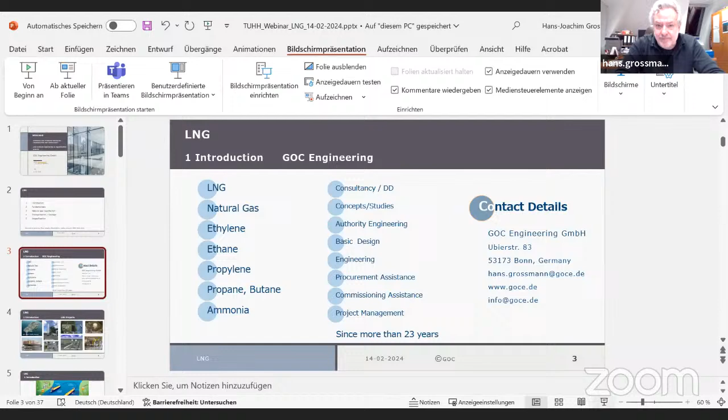It looks like there is some technical problem with him, because 2 minutes ago he was still here. Yes, but I'm still here - can you see me? We can hear you. We can see you now. Okay, perfect. I will share the presentation now. Yes, please. Oh, where are we? Here we are. Okay, it looks like it works.

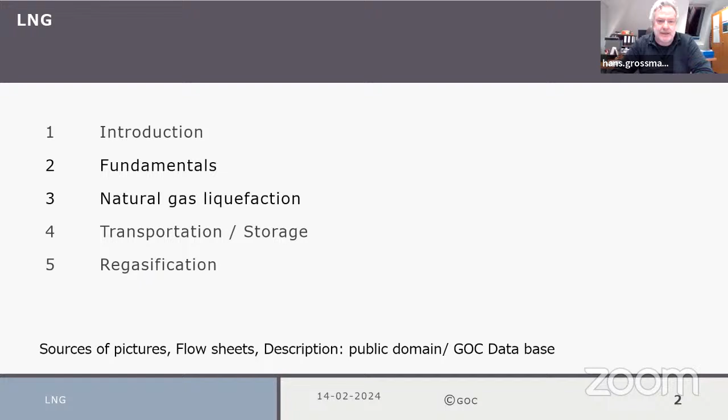I'd like to give you an overview of how it looks when you start to liquefy methane, and on the other side, how it is later regasified. We will have some introduction, some general fundamentals, so we can see where we are. Then we start with natural gas liquefaction - I call it natural gas liquefaction because what we are doing is not liquefying pure methane, we are normally liquefying natural gas. It will come then with transportation and storage, briefly, and then we go into the final part on regasification. Let me give some background on where we're coming from - GOC is an engineering consulting company in the field of loading and storage of liquefied hydrocarbons, ranging from propane, butane, propylene, ethylene, up to LNG, and we offer various services in this field.

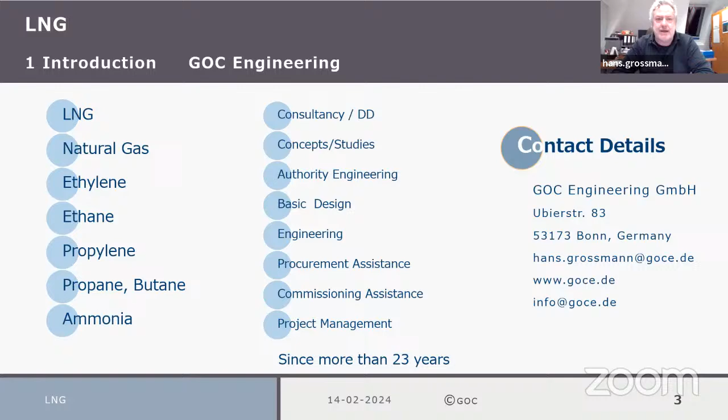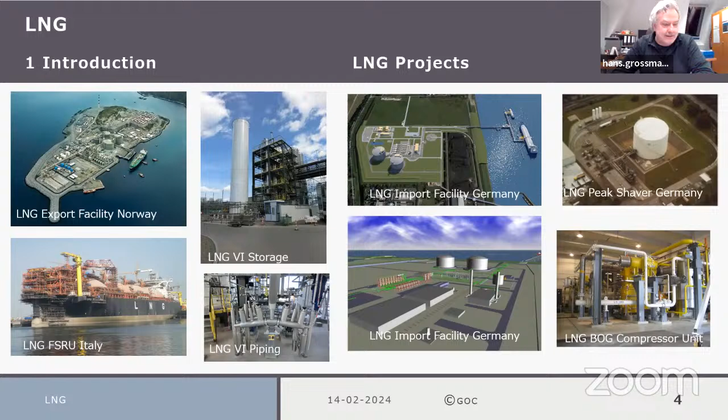Where we have been in various energy projects all over the world, starting from import-export facilities in Norway, up to FSRU in Italy and some others. We are also working on the import facility which should be developed or built in support of Brunsbüttel.

Looking at the overall view, this process starts within the liquefaction plants, where we have good sources of natural gas to import, but could also be where we have good sources of biogas. So it varies, and we have to see where we are on it. Then we step over to the other side, where we import or export our LNG product, and what we do to vaporize it and send it to our final clients.

Some small footprints also here to show what we are in.

What is LNG? Once again, LNG is not pure, it's a mixture. LNG mainly is of course methane, and it depends on what sources you're getting it from. We've put on the right hand side a typical composition from one of the key market players, Qatar, and you see there's a large portion of methane, but still others in heavier hydrocarbons like ethane, propane, or others. This could vary all over the world depending on the sources, so there's always a range we have to look into.

LNG is odorless, colorless, not reacting, normally stable, not toxic, not corrosive. So if you have to keep it under liquid condition, you have to put it in insulated cryogenic storage tanks.

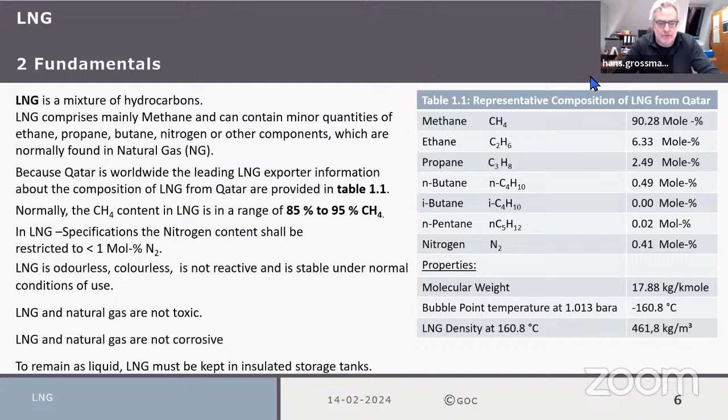Some things on the boiling points: somewhere around minus 160 degrees at atmospheric pressure conditions, at 18 bars somewhere around minus 110. So it's not pure, and the density even varies as well, ranging between 430 kg per cubic meter to 470. Again, these are only typical figures - it could always vary, and this will be part of your design criteria.

Liquefaction - what is the theory behind LNG liquefaction? What you like to do is normally be as close as possible to the natural cooling curve of natural gas, which has normally three main sections: a pre-cooling zone, a liquefaction zone somewhere in the middle, and some type of subcooling. We'll come later to what this means with mixed refrigerant and others, but this is just to show the idea behind it.

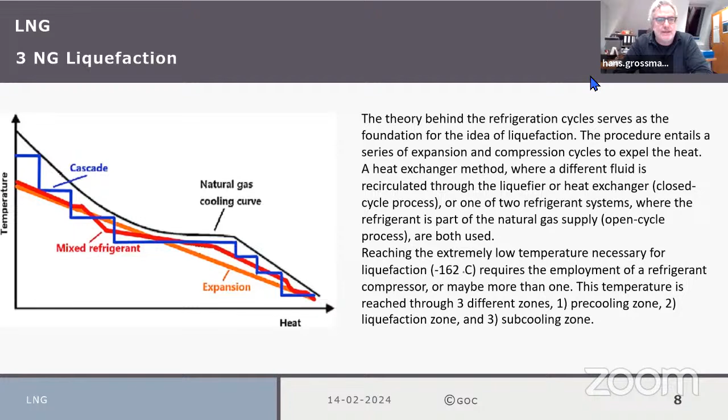You normally use various combinations and series of expansion-compression cycles to take out the heat with heat exchangers, all different types. It's all bits and pieces you have to put together to come as close as possible to the natural gas cooling curve. This is the main part behind it. When you look at the different types of processes, they're all trying to come as close as possible to this curve.

In general, there are three main different types of cascade liquefaction processes: one is cascade, one is mixed refrigerant, and the other is some expansion process. If you divide this, these are the main groups. Of course, within cascade liquefaction process you can also have some mixed or pure refrigerant - we'll come to this in a minute.

Starting with the easiest type of liquefaction: if you have enough pressure in your system - a high pressure pipeline system - you can use it like an open cycle process. You compress it to a high pressure, starting then to liquefy it, using Joule Thomson expansion for the cooling back.

At the end, if your pressure is high enough, say around 100 to 200 bars, with your Joule Thomson expansion you will get out a fraction of LNG. It's not too efficient, but we've seen some projects, mainly in Eastern Germany, Eastern Europe, or Russia, where they have high pressure and use it this way. Or if you're at the end of a pipeline grid where you have some of this pressure, it works - but once again it's not very effective and efficient. We'll come to this later on.

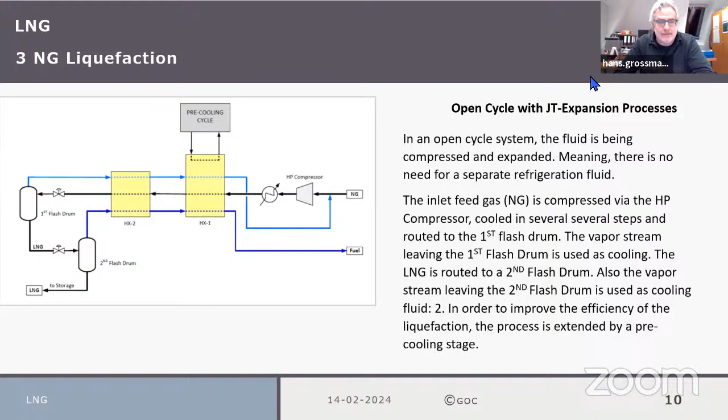One main thing to say, because we are starting with all this process, you have already to look into your gas treatment. When you're taking out natural gas from the earth or from the pipeline, it is not suitable to liquefy it, because there are still components like CO2 and others which you have to take out. Therefore, if you look at the footprint of a liquefaction plant, you always see at the beginning huge equipment with the only function to treat the natural gas first, so that you're able to introduce it into your liquefaction plant.

This is not part of this session, but you always have to keep in mind that there's a huge amount of investment and huge equipment already needed to treat your feed gas. Here we have a single nitrogen expander process.

This works just by compressing and single work expansion of nitrogen. The advantage here is that the nitrogen practically remains in the gaseous phase, and you only need the sensible heat which you take out for the cooling. On the other side, you need a huge amount of nitrogen, and it's not very efficient.

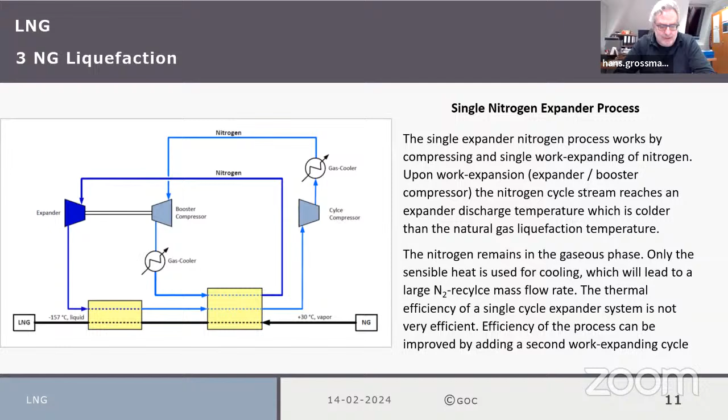This means we come in here with the nitrogen, have the heat exchangers going out, and there you have various loops to cool some of the natural gas with the booster expander and so on. There's also flexibility to add a second work expander cycle. This is just to show you the so-called nitrogen expander process, which is also in the market. How the market works, we will come to this point later.

The majority of liquefaction processes in the world, around 68-70% of all large-scale plants, are working with this type of dual mixed refrigerant process, patented by Air Products and Chemicals, with long lead experience. This is the so-called C3 mixed refrigerant process.

It's a process using propane as a type of pre-cooling to already take out some heat, then going into a central cold box heat exchanger where you have a closed loop of mixed refrigerant. Then you go back with your natural gas, which comes in at the top, and in counterflow to your mixed refrigerant you cool, liquefy, or subcool your natural gas.

The mixed refrigerant here could be a mixing of nitrogen, methane, ethane, and propane, all of which arrive and start to liquefy or vaporize. You have your individual sections in your cold box.

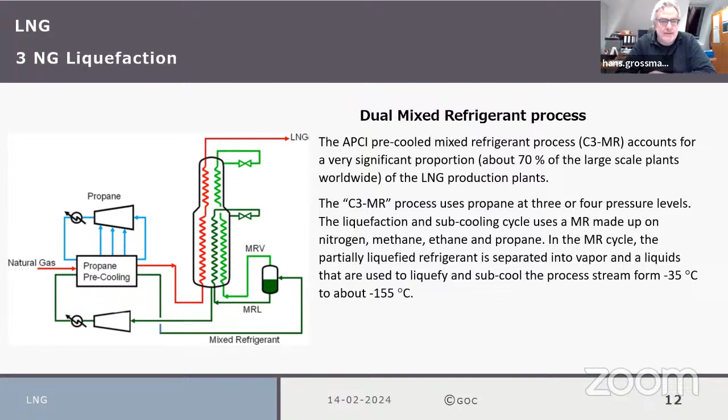This comes with subcooling from up to minus 155 degrees, and then you go out to your storage facility and maybe do your final Joule-Thomson expansion when flashing into your tank. This is the dual mixed refrigerant, one of the most known processes in the world for a couple of decades already, and of course it works properly.

There is an extension, or another process, called the expander process, where you're using natural gas and nitrogen as refrigerants. There are two independent cycles: one cycle using natural gas and normally methane as cooling fluid, and the other is also a nitrogen closed cycle, which provides cooling at moderate temperatures.

The nitrogen on one side, and then some of the nitrogen cycle, gives you the lowest temperature where you can cool down, or can liquefy your feed gas.

There are some options where you take out your heavy hydrocarbons. These are most of the things where process developers have their expertise.

Both cooling cycles, nitrogen as well as methane, remain in the gaseous phase. This means there are not too many problems in designing with respect to two-phase flows in your system or in your cold box.

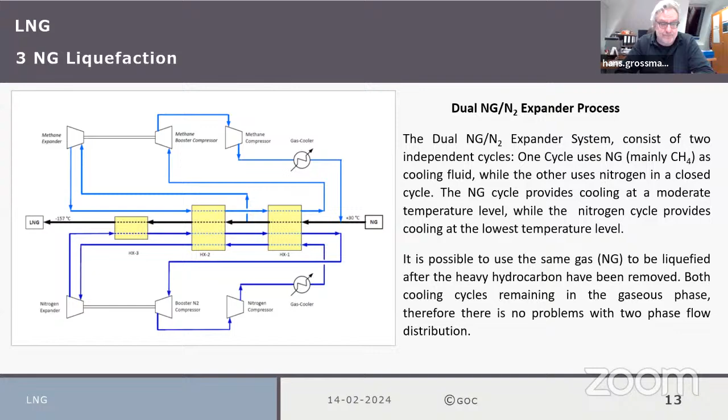Dual NG/N2 expander process.

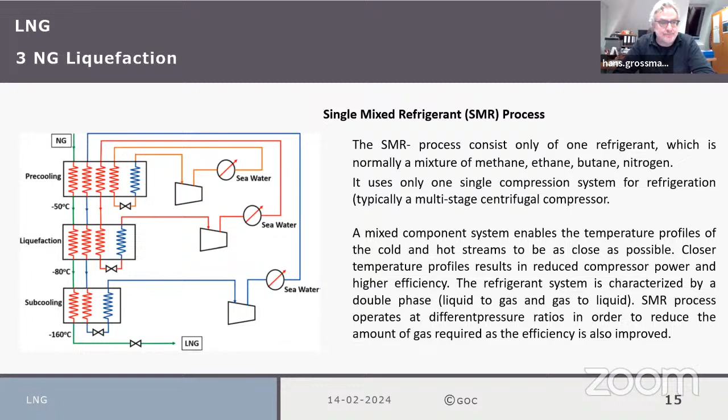And you can have double phases - on one side you're going from liquid to condense, liquid to gas vaporizing, and on the other side condensing in some parts. That's all part of the main heat exchangers. And once again, you have different pressure levels where you're working, which means you can also optimize the efficiency. That is the single mix refrigerant, once again well known in the area.

Just to have a small picture of how it looks like: this is a typical cold box prepared by the big makers like Linde or Air Products or others. You can see here the cold box, how many small tubes there are, how many different types of connections are on warm side, cold side, intermediate side, and all working in these tubes.

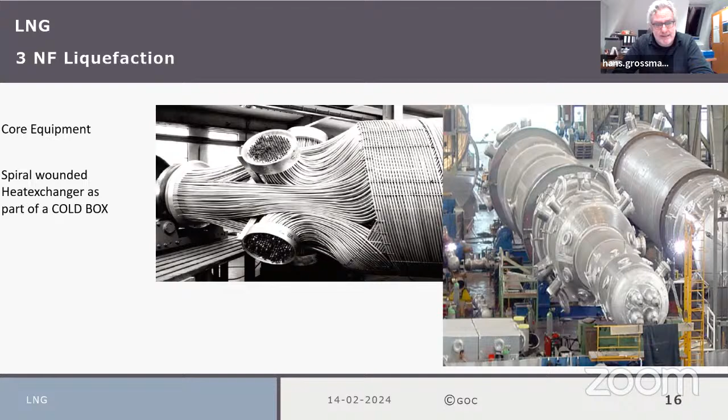Sometimes it's condensing and in some parts it's evaporating. So that is one of the core design challenges - to optimize this type of liquefaction, even knowing what is happening inside the tubes and in what area it's happening sometimes. You can imagine that you cannot have temperature sensors in all bits and pieces to look into. So that is one of the core challenges in designing, or even in the process simulation, of this type of equipment.

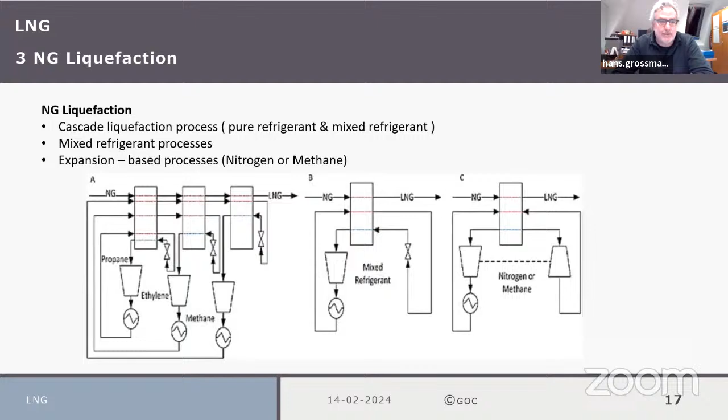So once again, we have three different types - could be doubled. We normally say cascade, mixed refrigerant, and expansion processes.

Having said this, you see the complexity of this type of liquefaction plant. Some of the design options where you have to start, or where someone beginning to design this type of process has to look into, is always a mixing, compromise, optimization of power consumption, of energy consumption. Even when you only look at power consumption of your compressor and so on, that is not enough. You always have to see the total system - what is also happening with your shaft power, with the efficiency of the heat exchangers and of the thing itself, besides of course capital costs, all the commercial things, and even operating costs.

If you have some type of batch operating, or continuous operation, or a variation in your operation, or you're running on one line, and how much you like to generate. And combined with this, you have to look into where you have maybe no chance for changes, like your natural gas feed conditions. Also, you need to optimize what composition you have to achieve and where is the best arrival point with respect to temperature, pressure, and flow.

The inlet temperatures with the minimum internal approach of the heat exchangers is one of the figures as well. And once again, efficiencies of compressors or expanders, besides the LNG rate.

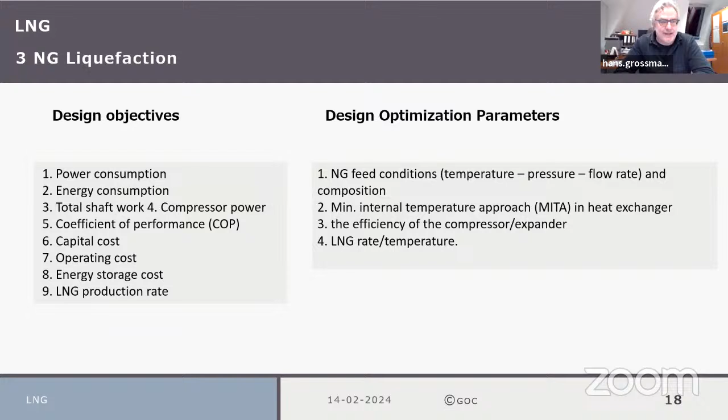So that's when you see the different types of processes, you see how difficult or challenging it is to arrive at saying my plant is the best one, or my liquefaction is the best one. You hear it always in the market, but once again, to arrive there is not so easy. So people will ask, what is then the best for these processes, maybe the best train efficiency or specific power.

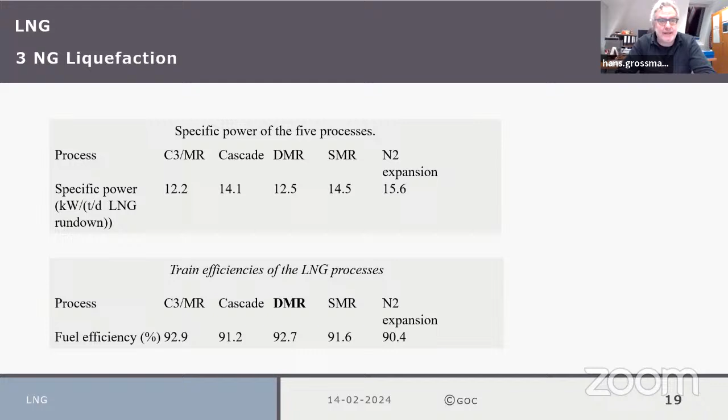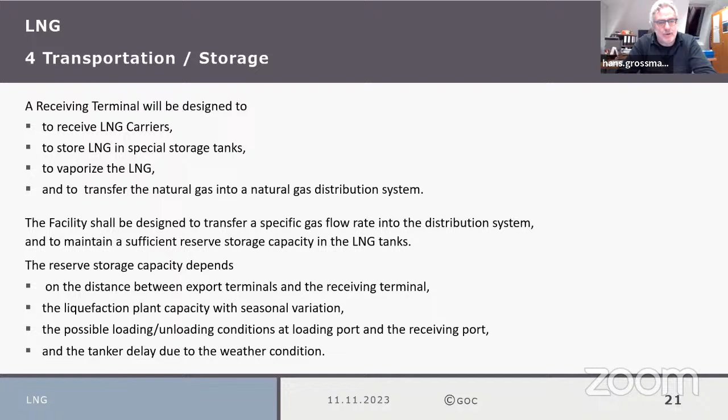Transportation, I guess the sea side will come later on with the second paper.

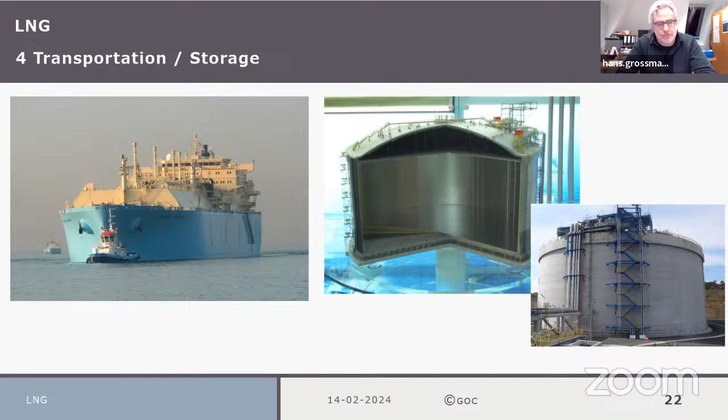Regasification: we've shown how it works. It comes from the ship, stored in the tank, very simple. There's also a boil-off handling system to maintain the low pressure and low temperature in the tank, using a recondenser to take out the LNG, and then a system to vaporize it. Normally you need a high pressure pump somewhere in advance due to your pipeline pressure. In addition, you can also take it out and send it by rail, by truck, wherever you want.

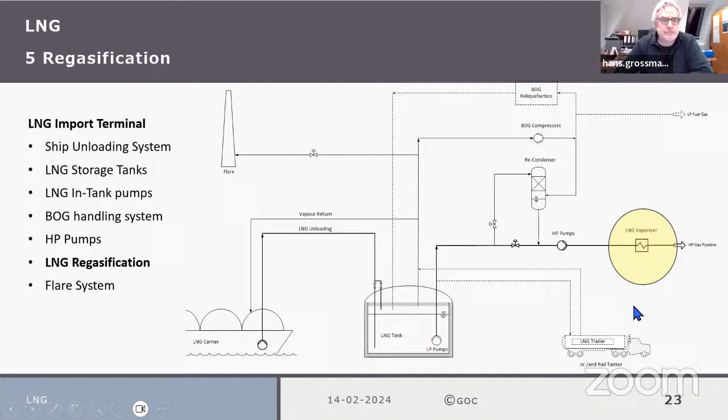The principle is simple: you want to regasify it, bring it back into gaseous phase, with a temperature slightly above 0 degrees, and maintain this temperature in your pipeline system.

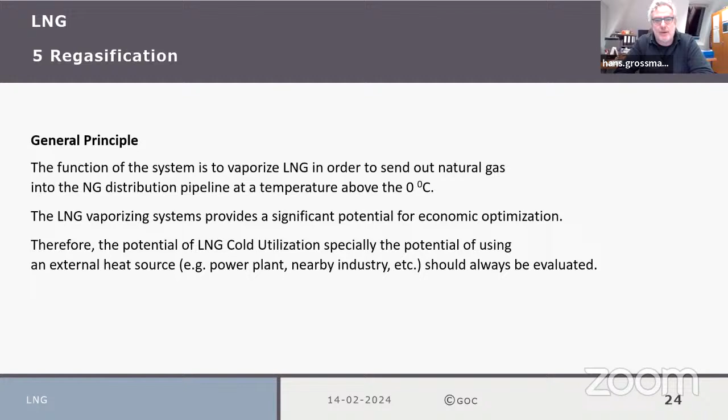There are always a lot of potentials to optimize the economics of the process, and cold utilization is one of the main principles to look into before starting any regasification work. Go to your neighbors and see if they have any type of waste heat, warm water from power plants, or whatever, in sufficient composition and capacity, which you can then use to vaporize it. That's the best way to optimize your entire system: look in the area instead of building in expensive, independent vaporizing concepts. So please look into your neighborhood and ask them for waste heat.

There are different types of vaporizers: mainly open rack vaporizers, submerged combustion vaporizers, and others using intermediate fluids and heat transfer fluids, direct and ambient types.

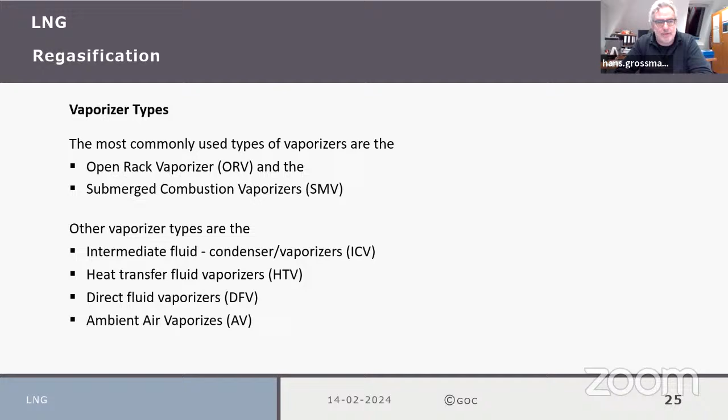We're coming to some of the common parts now. One of the main types used in base plants are open rack vaporizers. An open rack vaporizer is quite simple.

It's common practice, with a lot of import terminals having this type of open rack vaporizer, even in regions with warmer temperatures where it could work. In our region, or regions with minus temperatures, there's only a chance to use this type if you warm up your feed stream of water or have warm water available. But they are more commonly practiced in warmer regions. They look very heavy, and they are loud and noisy.

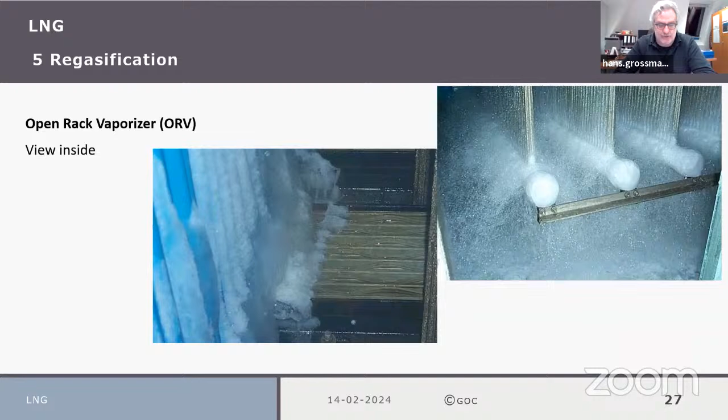Normally they are easy to operate, with low operation costs. Most are static equipment, with no pumps or anything else needed. Simple construction, and stability of heat transfer because you have this free-falling water film within. Alternatively, you can have a warm loop, a bypass loop, which you can use also over larger areas - these are more for large facilities.

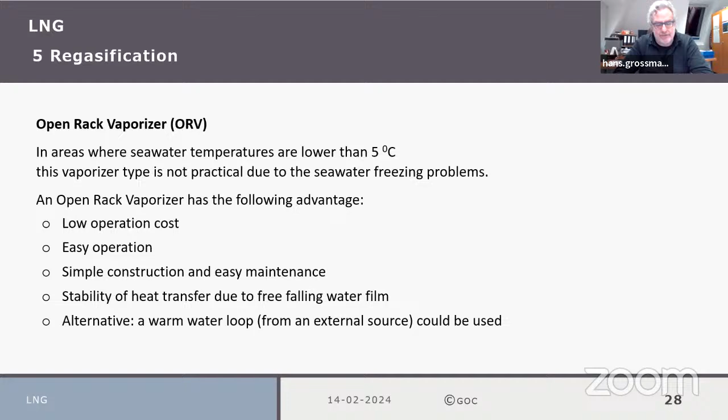Due to the reason that you can't use open rack vaporizers during wintertime, there's the so-called submerged combustion vaporizer. This is a big pot where you have water, and you heat this water with a flame inside the system, meaning you have a type of burner system with a pilot burner, central burner, and main burner, requiring fuel. You have your water tank, and this fuel, this flame or flames, warms up the water.

There's a lot of turbulence then in it, via a tube system or bundle system. Your LNG comes in and will be then vaporized against this water. Then somewhere we have a vent stack, and that's the system of how it looks like.

One of the main disadvantages of this one is that you need really a lot of fuel gas, which goes up to 1.7% of your total throughput of gas that you are producing.

You can imagine that is already expensive to run this type of submerged vaporizer. Normally used only in peak during wintertime or where they need them, or used as backup if your key vaporizer system is not in operation due to maintenance or other reasons. Then this is normally used as a backup.

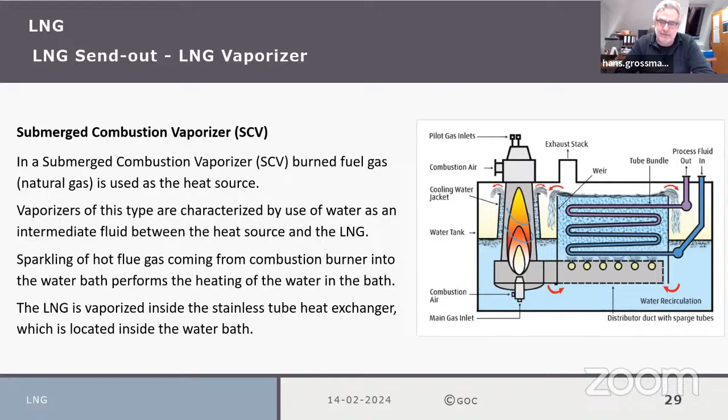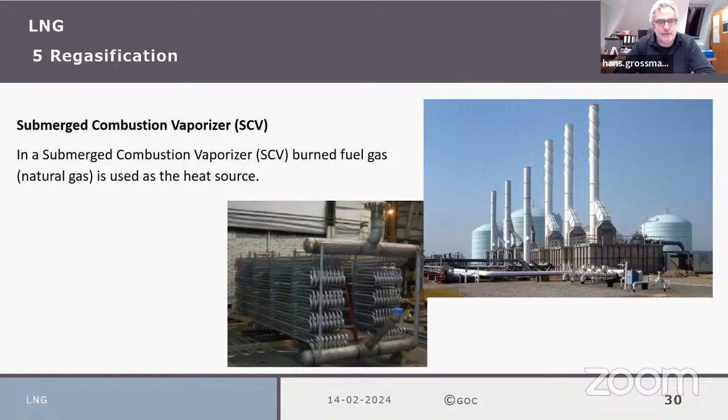You need the vent stacks depending on your emission permit requirements according to TA Luft, here in Europe. It's somewhere common practice. You find them still in the US in some parts, and in some other areas, submerged combustion vaporizers.

Developed in some areas where you'd like to have a closed and safe system to avoid any freezing, for example. This was a development of an intermediate fluid vaporizer, which has an intermediate refrigerant, for example propane.

This acts so that you're having an indirect vaporization. That means you have not a direct link from your seawater or water to the LNG, to avoid any freezing problems or tube ruptures and anything like that.

LNG goes in here and will be then also vaporized against condensed propane and goes back. There's a second part where we will heat it up a little bit more, and then it goes out to your natural gas grid.

On the other side, you're getting seawater or hot water, wherever it is in your system. On the tube side, it will then condense and vaporize the propane in a closed cycle. And then once again, this will be condensed against vaporizing the LNG. Well-known practice, works perfectly.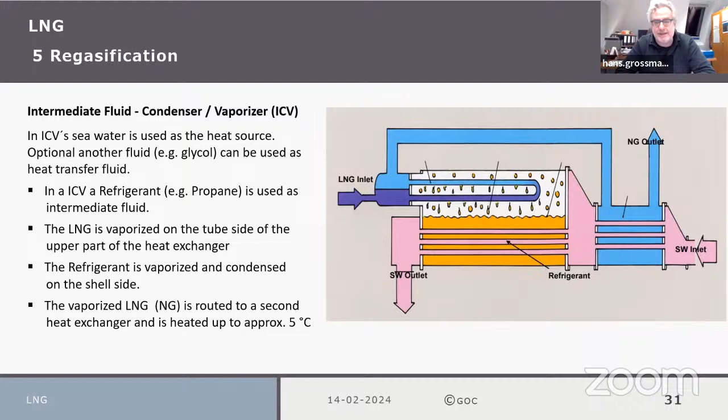How they look like: they are normally installed in a horizontal area with all the stuff around. Well-known. You can also use instead of propane some other fluids, so that is somewhere practical.

In respect to the heat source, if you have seawater or others, always heat integration. If you have some other fluids, easy to control, easy to operate, very low freezing risk. Is always a point if you're doing your hazard or your safety studies.

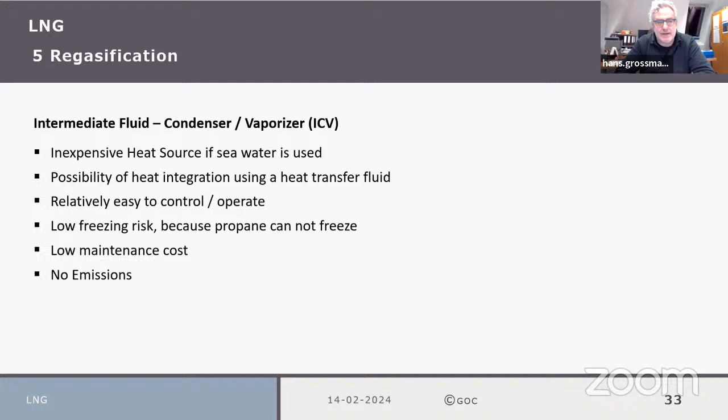There is only a limited amount of propane as a closed cycle in, but once again you don't have the problem of freezing, and this gives low maintenance costs, and more or less no emissions with respect to not burning something.

Another way to do it, there are of course also direct fluid vaporizers in the market. They're just simple shell and tube vaporizers where you directly vaporize against water or seawater or fresh water, or some other fluid, with the LNG.

It's also inexpensive to do, but once again, you just go in on one side, only on the tube side you are in, and on the other side you have your seawater or your heating source as water, and this against it will be then vaporized, and on the other side you will take out the natural gas.

However, there's always some safety concerns if something's not working. For example, if your seawater entrance is blocked and you're not getting sufficient seawater, then there are some safety concerns regarding freezing, relieving, tube rupture, release of LNG. But once again, also they are in the market.

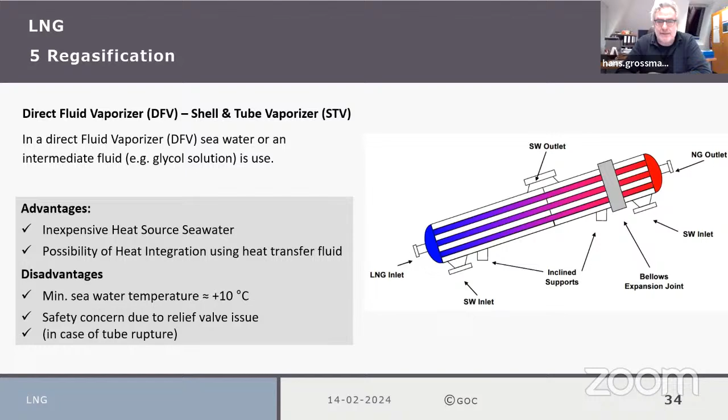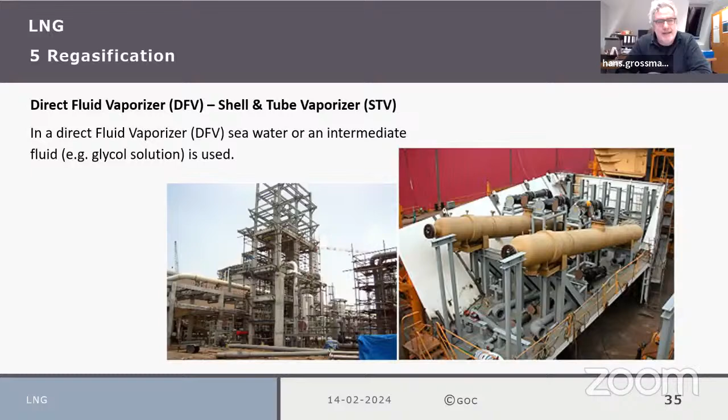It looks more or less similar to the ICVs. Some are horizontal on the ship, for example, for FSRUs, and then also vertical situations.

One further group which you may have seen already is ambient air vaporizers. These are, for example, also used in smaller capacities like biogas and others.

What is this? You may know it from liquid nitrogen setups. There are, let's say, aluminum or fin tubes placed on it, which will be vaporized against the air, or not vaporized against the air. You use the free air as a heat source to vaporize the product.

You normally have 3 sections. For example, one is in operation, one is standby, and the other one is maybe already icing, because if you have too much icing around it, you have to stop and warm it up again so that the ice area will be warmed up.

It works and is easy operating, nothing too much to do on it. Just open the valves and so on, and maybe control your icing.

However, in our region, what you see always with an LNG installation is mostly condensed air, condensed humidity in the air. That means if you have a large installation of these, this could result in a so-called fog bank, meaning heavy fog, which could disturb your traffic or your nearby neighbors, and so on.

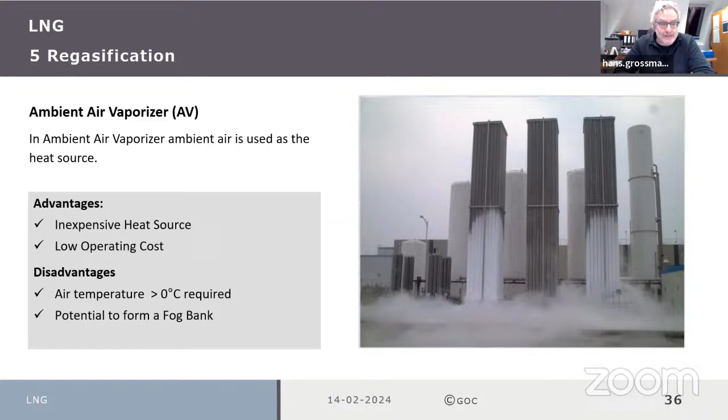This brings me already to the end, which is normally the innovation of the day. Here you can see an example of how you can do environmental friendly blocking of a valve. That is really a picture made at an LNG installation a couple of years ago, which was

somewhere blocked in, not in operation anymore. After a couple of years, you can see that nature is starting to take back its plot. This brings me to the end of my presentation. Thank you, and the floor is open for questions.

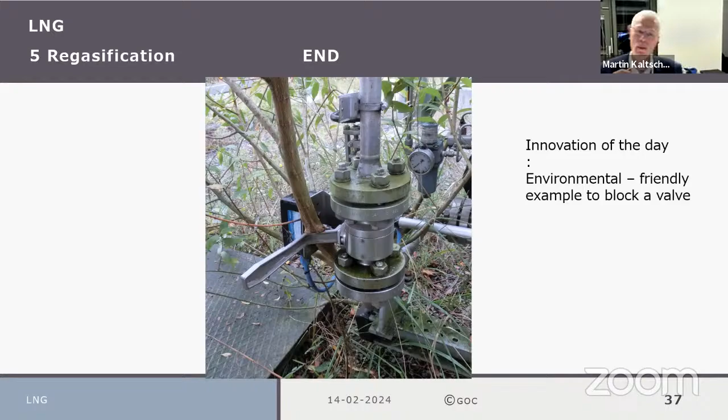Hans, thank you very much for this very nice and very interesting presentation. We really learned quite a lot about how we can bring LNG or synthetic natural gas into the liquid phase and regasify it at the point of destination. Thank you very much for that. I was really impressed by the very nice photos you showed of these different units, they are really huge. Thank you very much. We will come back with a small roundtable discussion after we finish the next presentation.

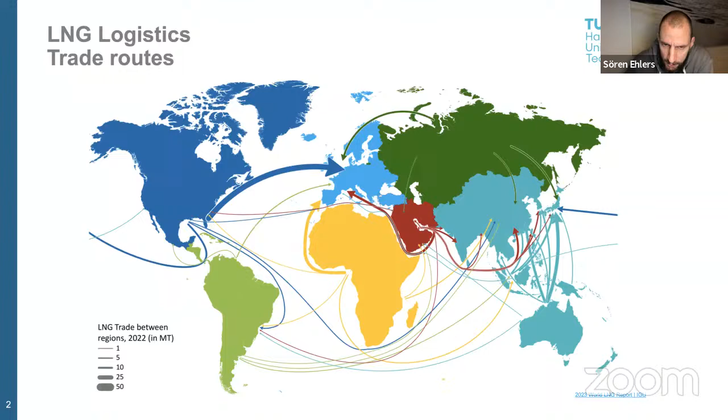Analogously to the presentation we just saw, you will find these liquefaction terminals and regasification terminals at the corresponding locations on the shoreline. When you want to export, you usually do this in liquid form, because then you have LNG that allows a higher energy density for the volume you want to transport, and that's the whole point of doing that. Then it's a bit impractical at the destination site to further utilize liquid natural gas at those cryogenic temperatures, so we use it in gaseous form.

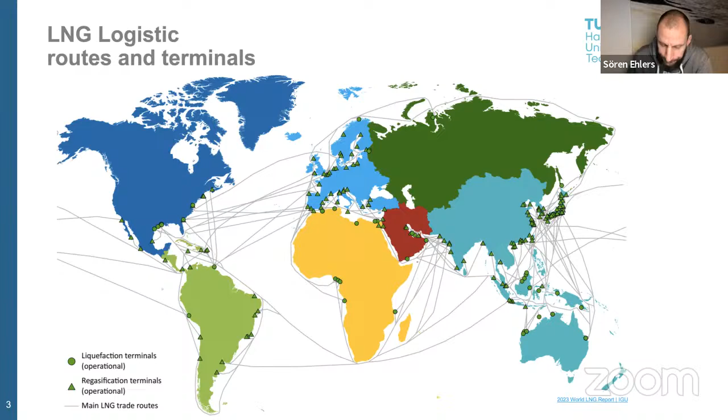A few numbers here just show the global trade. In 2022, we had about 400 million tons, a 7% increase compared to 2021, that was traded globally. There are mostly 20 importing countries, mainly the EU and East Asia.

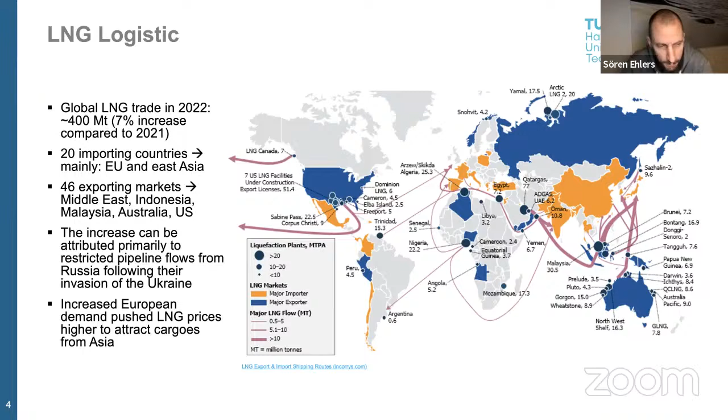We have about 46 exporting countries. And because of certain political conditions in the world, there's been quite an uptake in imports on the EU side. If you look at how many ports worldwide have LNG bunker facilities in 2023, you see a lot of them are in Europe, plus we have them in the US and here in the Far East.

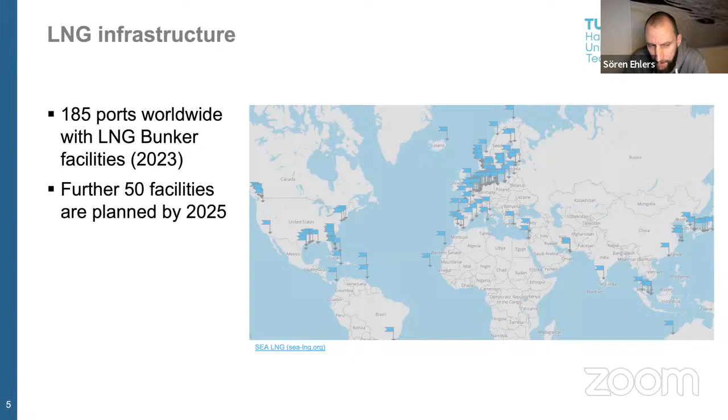There's about 50 further facilities planned by 2025 to be in operation. On the European side, maybe the interesting point is that the EU imported about a third of global LNG deliveries in 2022, with the biggest importers being Spain, France, Italy, the Netherlands, and Belgium.

Looking at that map, you get some understanding that these import terminals are at the seaside, where we have some in operation already and where expansions are planned - those are the ones half orange. We have very few under construction, one in Finland, and several that are planned and partially already in operation.

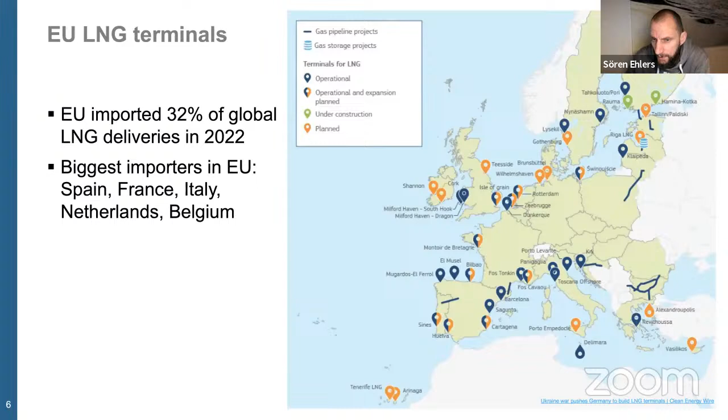You see a few pipeline projects also ongoing, because it doesn't help us if we only have the LNG at the port. We usually need to transport it further to the hinterland from that location, and maybe on shorter distances through the Baltic Sea and to some other parts. There are also very few gas storage projects currently ongoing.

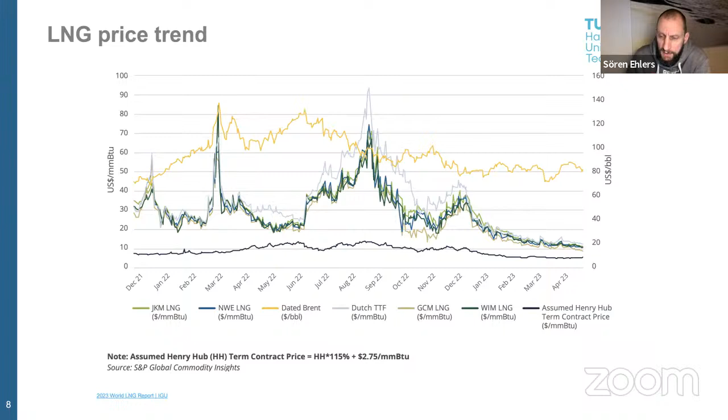When we look at the price, it's quite interesting to see that there are some fluctuations for certain reasons we had in the past, unfortunately. But you can notice that the LNG price actually became lower and lower. If you compare that to the oil price, which is also roughly at a constant level around $80 per barrel, you can see it's a quite viable option in comparison to oil.

Since this data ended about a year ago, I picked up some numbers last night. The chart went up, then there was some increase, but we are basically back at the same level for the LNG. So the price seems comparatively low and possibly rather stable - same stability we have for oil, but on a much higher price level. That makes it still a nice product to be shipped around.

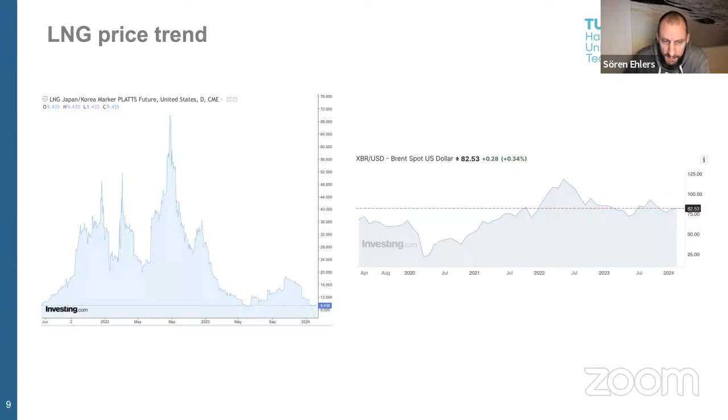That brings us to how we are actually transporting the LNG. Ideally we do that on the water using tankers, because some country on one part of the world produces it, and another country further away connected by sea wants to import it. The world fleet for this is about 734 LNG tankers by the end of 2022.

They have a capacity ranging from 2,500 cubic meters to almost 300,000 for large offshore storage units, but about 260,000 cubic meters for the tankers, making for a transport capacity of a bit more than 100 million cubic meters at a given time. The scales are large, the energy demands are large, and one reason we need to liquefy is this is the only format in which we can transport natural gas efficiently, given the density.

There are essentially two ship types for this. The one on the bottom left is an LNG tanker with a membrane tank, so it's not protruding much above the deck and follows the line of the vessel. Or we have spherical tanks, mostly built by Moss Maritime, which nicely use physics, because on a sphere you have the lowest area to contain any given amount of volume.

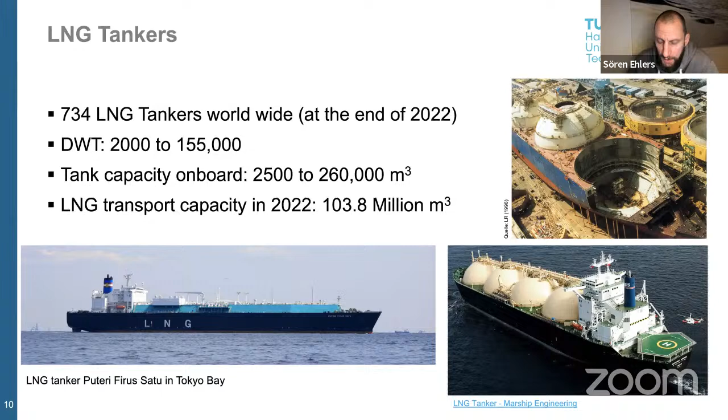And if you want to change the size of the ship, for example, if you make it longer, you could just make it longer by one sphere. But if you make it wider, you need a new shape for the sphere to be able to build that, and it needs to be nicely integrated into the vessel. So design changes are quite limited, and you need to basically build a whole series of vessels with the same dimensions of spheres to make this work. So it's not the most flexible, which is partially why we will talk a little bit more about these membrane tanks in a second.

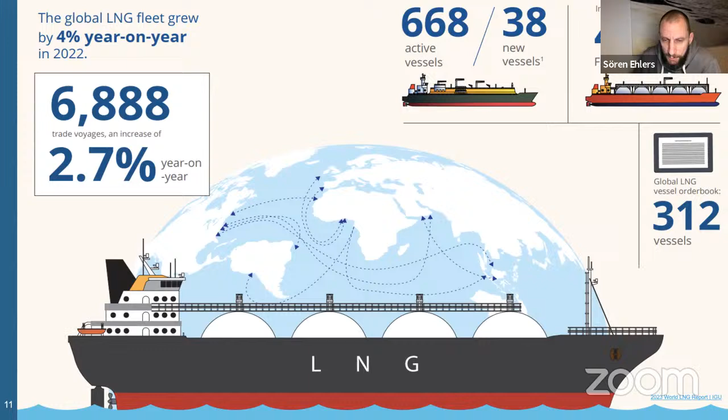But it is still quite a substantial fleet that we have transporting LNG around the globe. And we saw something about the bunkering stations, and the product, the technology we need on each end. So I'm not going to talk about that, but just a short slide on how do we actually get the LNG into the vessel if we also want to use that as fuel.

If we think of that, then ship-to-ship bunker configurations are found in several ports, and they are under development. It has the challenge that both bodies move, so you need to have these pipes that transfer the LNG with quite some slack, and obviously the boil-off that you have in that area is the most critical. So that poses some challenges there.

And what has been developed more and more is the truck-to-ship transfer, and that's the most used configuration that we see. It is quick to deploy. You don't need a lot of basic concerns for local authorities that you have to convince if you set up an actual land-based bunkering station. And that may be one of the main reasons why this has been used so far a lot, if you think about using LNG as a fuel as well.

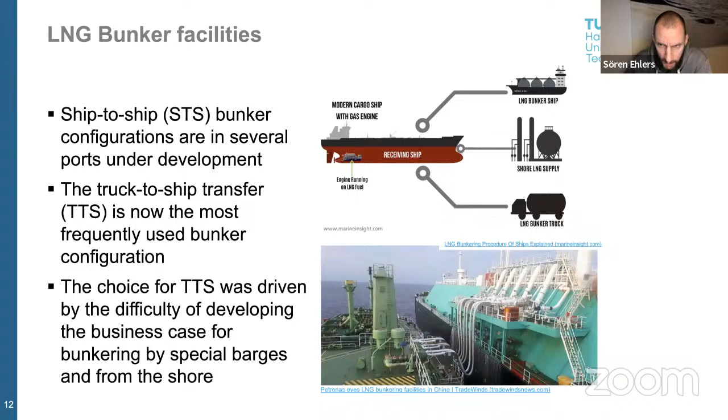And if you spill cryogenic liquid on steel, then you will most likely result in brittle fracture. And if the ship is floating in water, then there is a bending moment that this is subjected to because of the distribution of buoyancy from the water. So you have some stresses in the deck, and then you create a brittle condition of the material, and that can end up basically with two ships instead of one, in the worst case.

And in any case, the local damage may not be nice, so you have to be very careful with that. But it is a standard procedure, so it can be done. And obviously, when there's an accident, there is an accident. You have to mitigate the consequences nicely.

Now, when we talk about tanks, then IMO classifies LNG carriers basically with two different types of tanks. They can be independent or integrated tanks. An independent one are the type A, B, and C. They allow a certain amount of pressure, and they need a full secondary barrier, a partial secondary barrier, or maybe none. And the other option is the fully integrated tanks, which is the membrane tank.

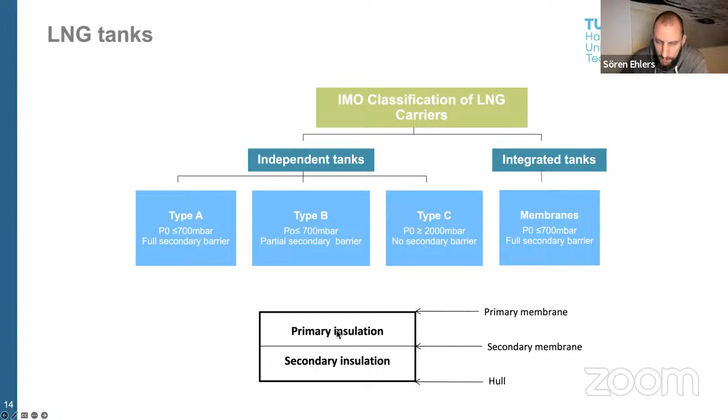So while the spherical tank would basically be an independent tank that you just place more or less as cargo in the vessel, the integrated tank needs to be fully integrated into the design, but has the benefit that it can utilize the space that you have on the vessel the best. And essentially, you basically have the hull structure, and you have a secondary insulation. You need a secondary membrane or barrier, and then you have a primary insulation and a primary membrane. And the reason why we are so picky with basically placing the most efficient shape in a hull is what you more or less see here.

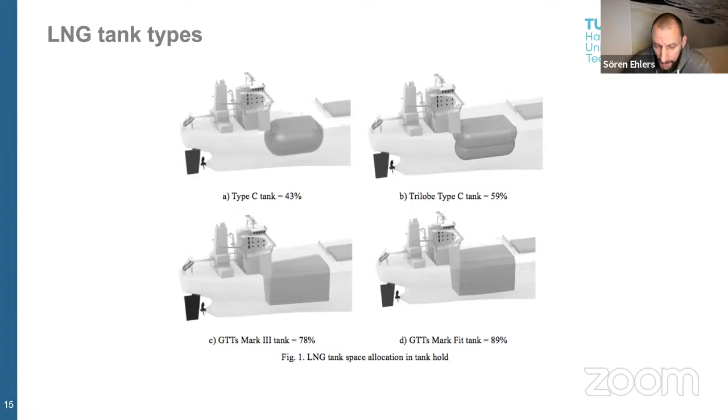So if you use a type C tank, which is a bit cylindrical, you utilize less than half the available space on the ship. If you optimize that a bit, it may go to 60%. But if you use a membrane type of tank that you embed into the structure so it can follow the hull shape as much as possible, then you can go up to even 90% space utilization, which is quite nice, and which is why these are dominating what we see out there.

The shortcomings are that when you use such a membrane tank, you need a complete double hull vessel - on the bottom, on the sides, and on the deck. And you need two membranes, with the second one able to hold the LNG for at least a fortnight. Two layers of insulation are usually used, and the insulation space is typically inerted with nitrogen.

That would mean you could also use this to stabilize if you had a leak in the primary barrier - you could increase the amount of nitrogen to push the LNG back. And you need cofferdams between the tanks, and you need to anchor the containment system inside the hull.

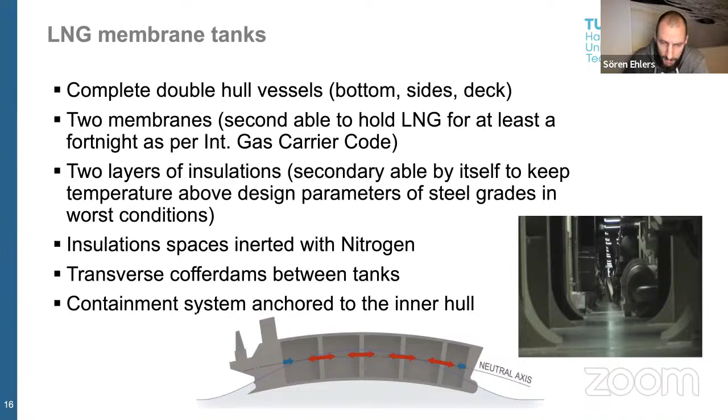If you have the ship in water, it will basically bend - upwards or downwards - the ship is not rigid, so it deforms quite a bit. The tank system has to comply with these deformations, which are not necessarily small. So you have deformations from the movements of the vessel, and of course possible deformations from the thermal stresses exposed to the structure during loading and unloading conditions.

If you look at a GTT Mark III tank as an example, we have an insulating panel made of reinforced polyurethane foam - that's the two foam levels in yellow you see here on the bottom. Reinforced means there's a layer or multiple layers of chopped fiberglass strands inside, which basically act as crack arresters and make that foam stronger. The density of the foam can be adjusted according to the insulation properties you need.

In direct contact with the LNG, we have 304L stainless steel, 1.2 millimeter thin sheet that has to be specifically made with corrugations in longitudinal and transverse directions, so that when thermal stresses or deformations act on the structure, it can cope with them.

Because we need to essentially glue and mount this insulation to the inside of our hull structure, and when the hull structure bends, this needs to be able to bend too. When you cool it down, it wants to contract, and especially the corners may be a problem because it wants to pull away from there. So you see there are some specific slots in that structure.

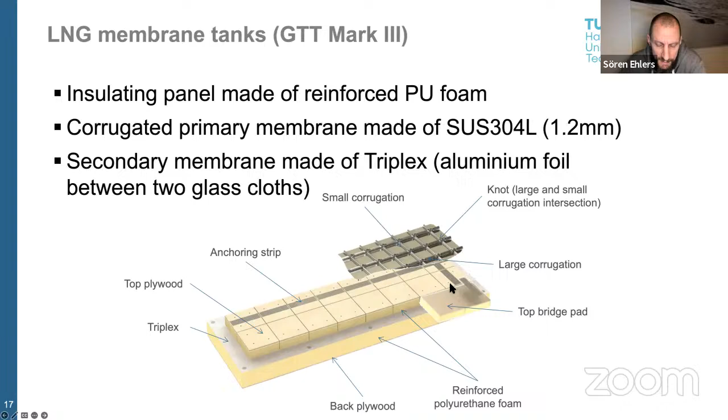If I jump to the next picture, you can see that even better - that corrugation is placed just above a slot in the primary insulation foam, and then there's another slot in the secondary insulation foam, so that you have a fairly flexible structure.

There are some bolts here that may suggest the whole thing is bolted into the hull structure, but this is mostly temporary while you install it. The actual force is transmitted through these mastic ropes, which is an epoxy resin.

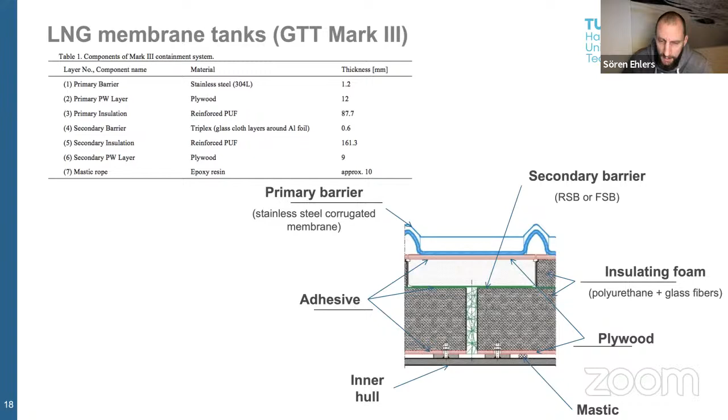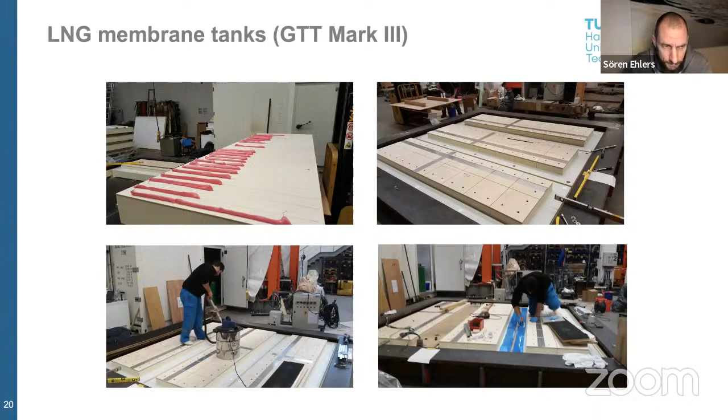And on the top you see this mastic rope, maybe not the nicest consistency here, but nevertheless doing its job to compensate for the differences in tolerances.

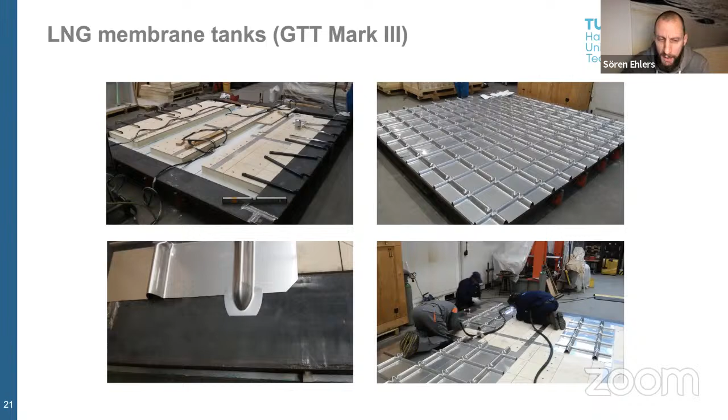And then it comes to the internal barrier, so the stainless steel sheet. With this 1.2 millimeters, you can nicely see these corrugations in both directions, so you have a lot of stretching possibilities in both ways. And these are TIG welded without any filler material. So it's actually quite impressive to see that.

And you have to do tightness tests or tests for any possible cracks and whether these welds are intact after they are created. You also have to weld above, along these corrugations. So there's zero tolerance for error, and everything is done by hand.

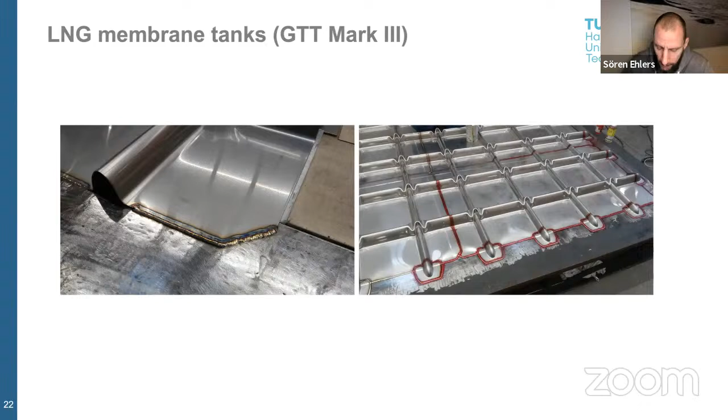Not entirely. I mean, this was for that small mock-up, it was done by hand. There are some machines that help to do this along the longer seams, but a lot of the small parts may be done manually.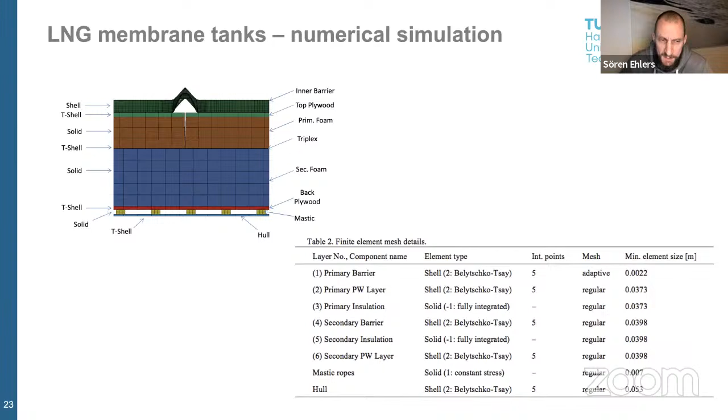So to do this consistently means that you need a lot of computational power if you want to simulate something. Now, what you see here is different material models that may be used for the different components. Here, for example, you also have to keep in mind it's not just the base material, but because of the corrugation, you need to consider how that structural component behaves, and account for that in the stress-strain behavior.

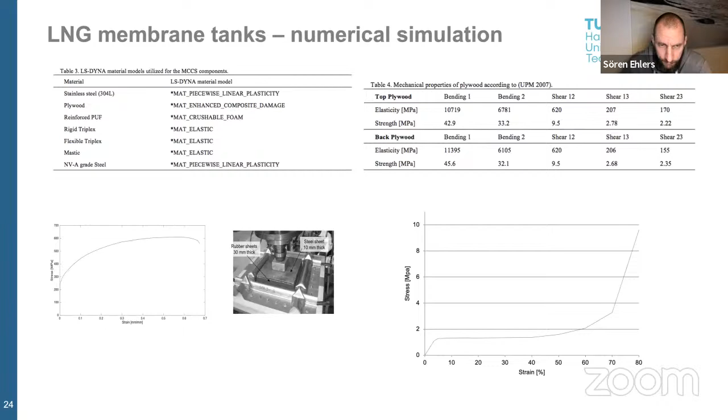And here you have some mechanical properties for the different plywood components. And this is actually for the polyurethane foam and how this behaves, mainly in compression. Now, when you plug this all together, and you have a test to compare against, which can sometimes be quite nice, you can get to see that, you can get kind of reasonable behavior. You can unfold these corrugations under large deformations.

Comparison between experimental force displacement curve and numerical is not ideal, but there's so many things happening that we were quite happy with that. And essentially, the takeaway from this, and especially the test, is that if you would scale this up to a full-scale tank, you would need to penetrate it by almost 8 meters and have about 400 megajoule of energy available before you would cause rupture of the barriers.

And that is enough for the majority of the possible collision or damage energies that you have available. So in essence, you can say that such a tank is pretty safe to use, and the technology is quite advanced, but also relatively complex.

Now, there are a lot of other tanks out there, of course, one being, for example, the NO96. And that has a lot more wood inside. It's an older generation, but a lot of vessels are out there that may have their shortcomings or benefits that we cannot really talk about much now due to time constraints.

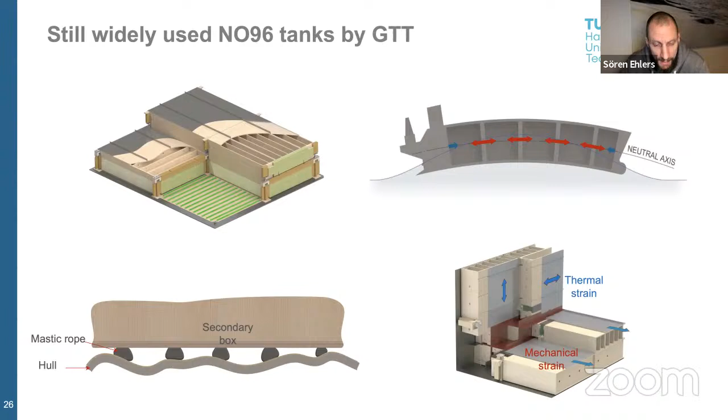But one part that is very critical is the corner connection, because you really have the stresses going in those two directions there. You may have a 90-degree corner, which for stresses is never nice. And here you have an interaction between thermal strain and mechanical strain, which makes it extra special. That is some area you have to meticulously design and try to take care of to compensate all the possible deformations that may occur.

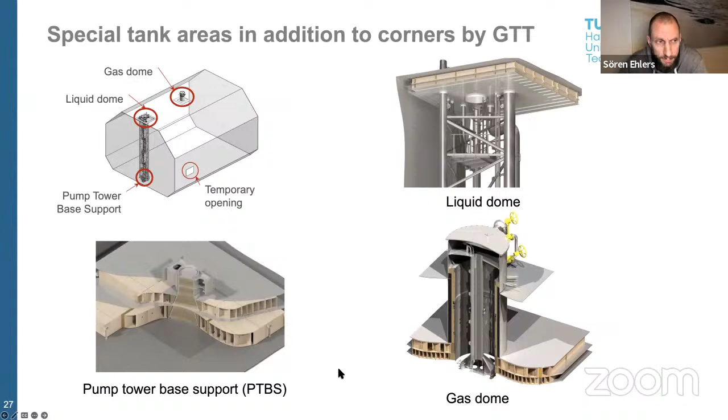And the other parts that are quite interesting in general to look into are obviously not the big surface areas and thermal coefficients or whatnot for this, because you can handle them easily, but the devil is usually in the details. That could be the liquid dome, the gas dome, the pump tower base support, or a temporary opening that you may need to enter and go in and out of while you produce this tank, or while there may be some repairs or other things to take place.

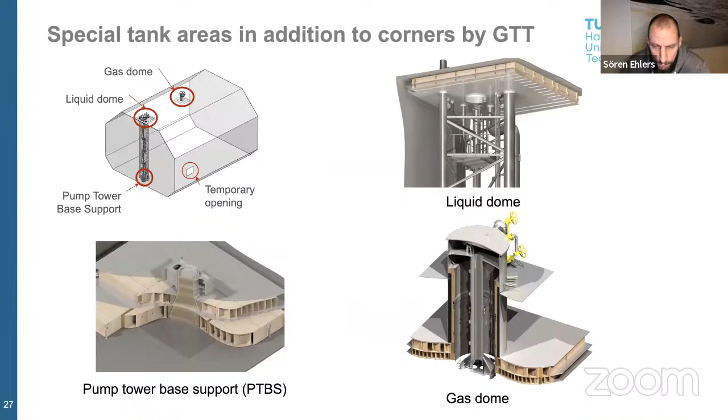In each of these, you are basically penetrating your insulation layer all the way through the steel structure. On the dome parts, the liquid dome or gas dome, you are protruding through the insulation layer and the double hull structure into the outside world. On the pump tower base, this is where the liquid dome sits, a bit like a cone, with the top of the tubing where the LNG is filled sitting on top. If you pour LNG into that, you get a high thermal gradient between the hull structure, which is more directly connected than in other parts, and the inside of the tank. So these parts are, from a thermal and stress perspective, pretty interesting and challenging to look at.

To conclude, significant amounts of LNG are and will be transported in the next decade still. LNG prices seem to continue to be quite low or even decline, which may contribute to more transportation and use of that fuel or energy form in the future. Handling of LNG needs specific measures and barriers in place, but more or less we can take care of all of them, which is nice. There's a lot of knowledge and experience on this. There are different containment system technologies, and membrane tanks seem very efficient and safe, and also allow for the best space utilization within a vessel. It's fairly advanced, yet requires meticulous preparation and considerations when you set up and build such a tank. And the details are usually the true challenge.

Thank you very much.

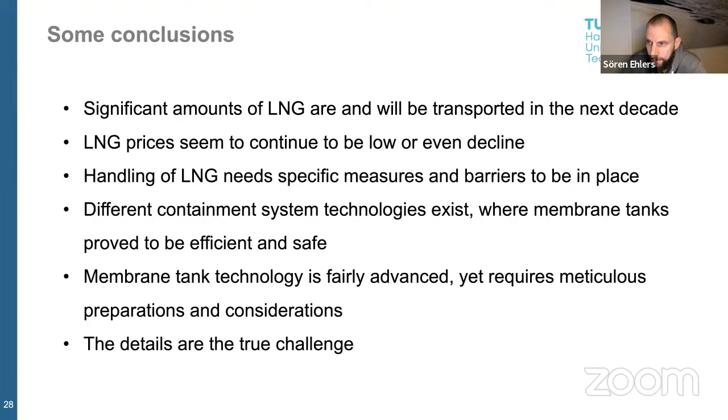Thank you very much for this very nice presentation with lots of input and a lot of challenges for true engineers - how to find a way to deal with these different forces which are ongoing there. So thanks a lot for this.

Now let's come to a very short round table discussion with Hans and you. Maybe we can start with a brief update. If I've interpreted both presentations the right way, the message is - please confirm or decline it - that if we would like to transport hydrogen in the form of methane, basically the technology is there, the infrastructure is there, the know-how is there, so this is a running system we can simply jump on. Is this as you see it, or are there constraints? Maybe we can start with Hans and then go to Søren.

I have to say no, because when we look into the different aspects - saying that we are liquefying, there are proven projects to liquefy natural gas down to minus 163 degrees. Of course, there are possibilities to liquefy hydrogen down to minus 253 degrees, but with a completely different set of processes. You cannot use this type of cascade or similar processes. There you already come to a limit.

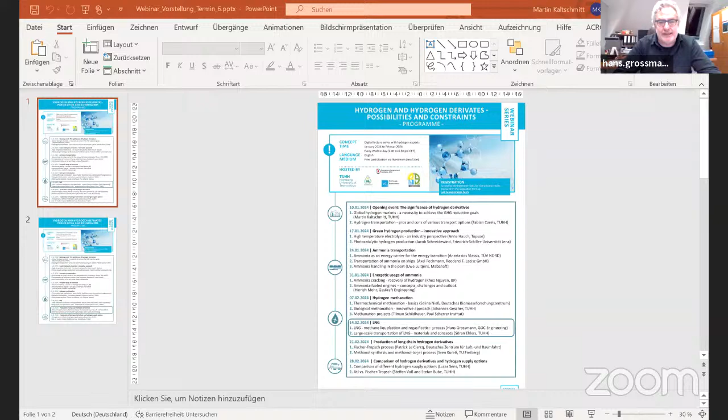When I see the future, to store hydrogen via methane in this type of already existing infrastructure, that should not be a problem. However, what I see is more a cost challenge when you look into the entire chain to produce somewhere LNG, or to have really this hydrogen chain from the beginning to the end, having seen also that there are still some other options like green ammonia and some other ways. I see really a cost challenge of the technology, that the overall chain per ton of produced hydrogen must be lower and lower.

You simply don't see any technical or other challenges technologically from your point of view, from the liquefaction and regasification units? If you have really methane and like to liquefy it, that's all fine. However, you have to see in the normal LNG chain so far already the liquefaction process is more than 25 to 30% of the overall cost of the entire LNG chain. You see, that is already a big part. And at the end, you have to see consumers who pay everything per kilowatt hour.

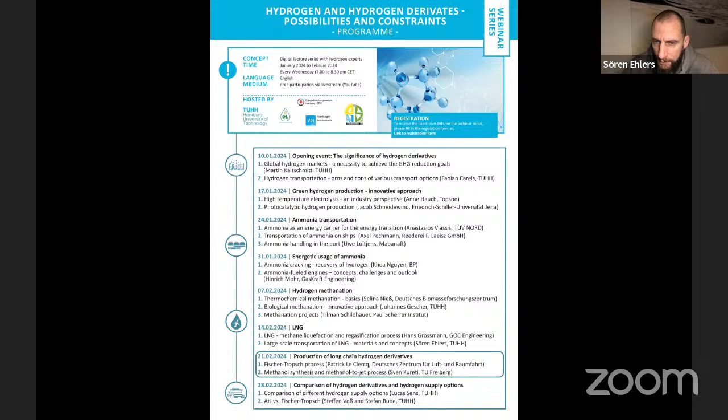So we need to talk more about this, and we need to be much more open on the demands and the capabilities. So I understood that your statement is that we should develop the demand for green fuels in parallel to the provision chains. Yes, because otherwise it will not work out. So, but then this is at the end of the day a question of setting the frame conditions. Okay, anyway, so far so good.